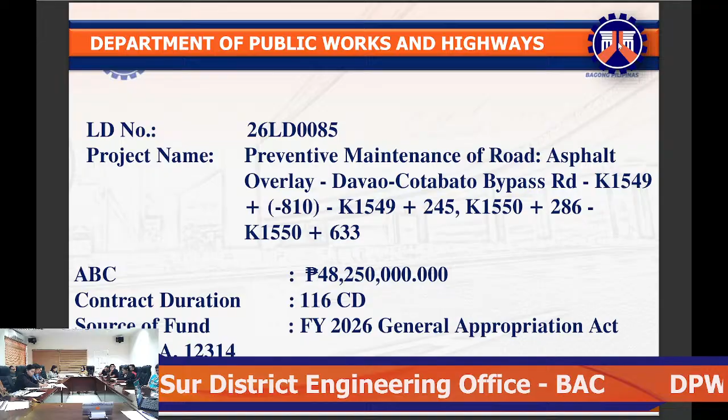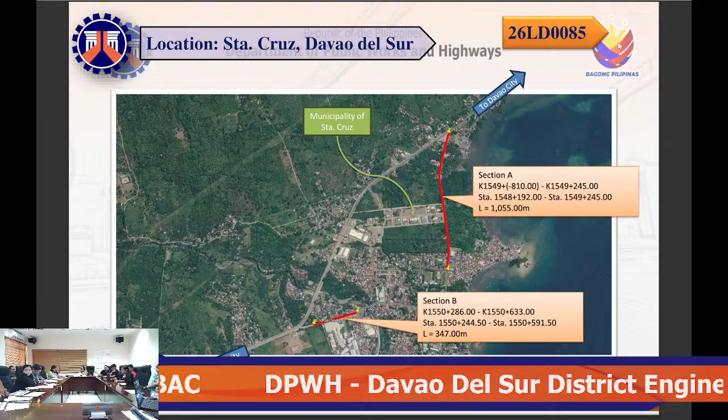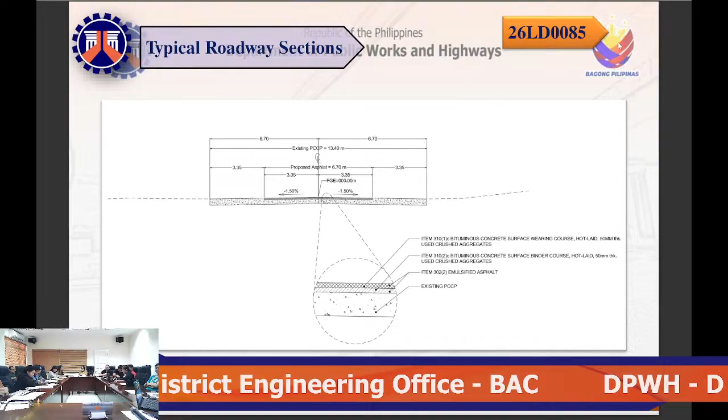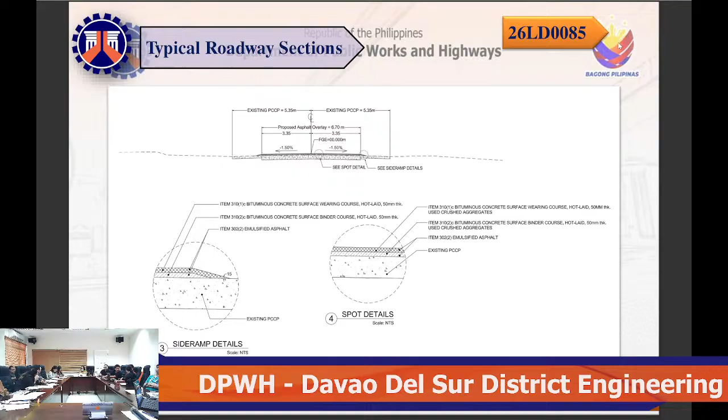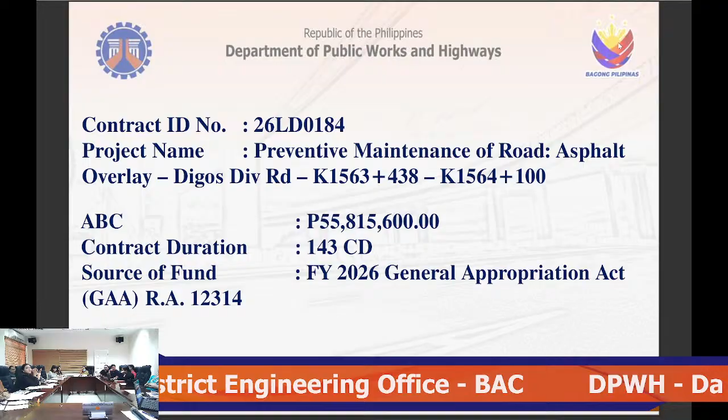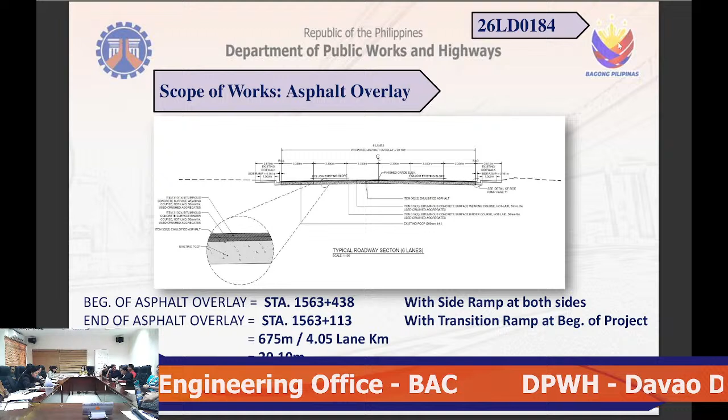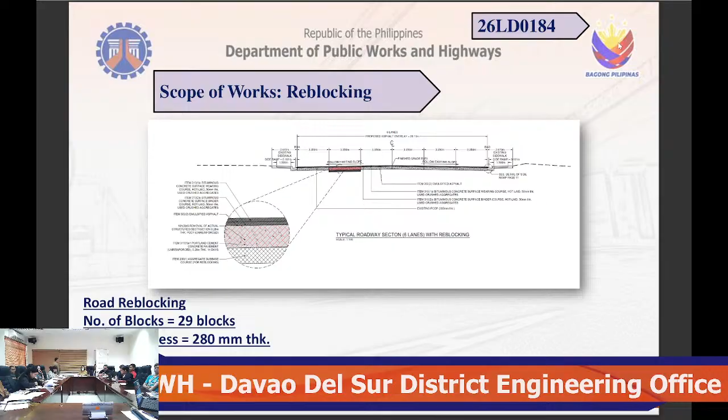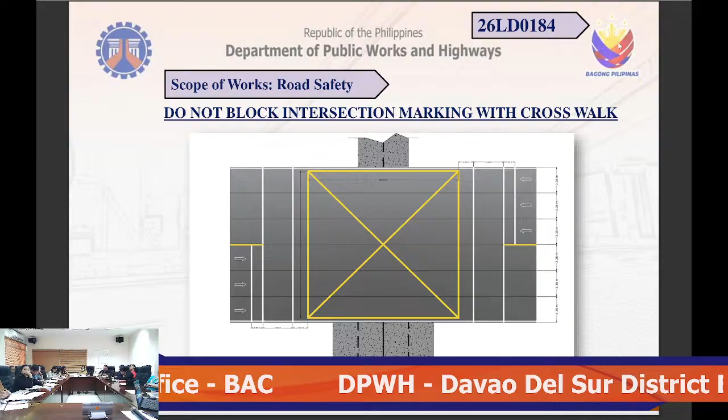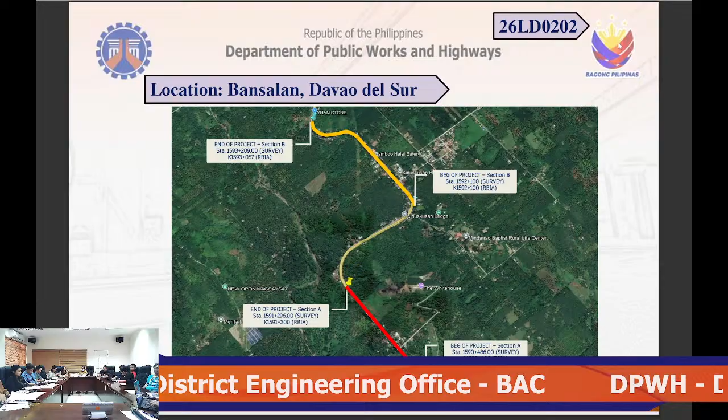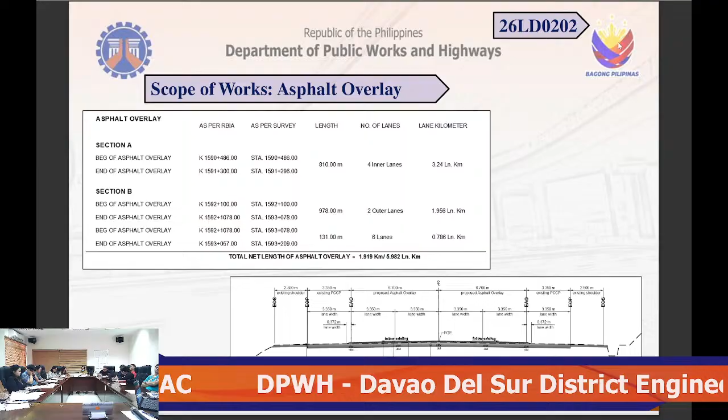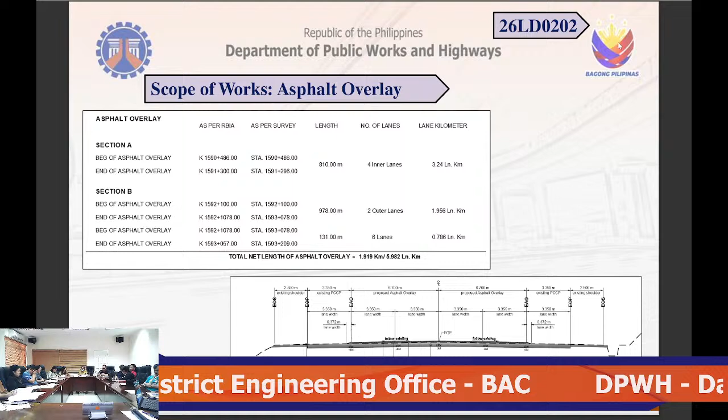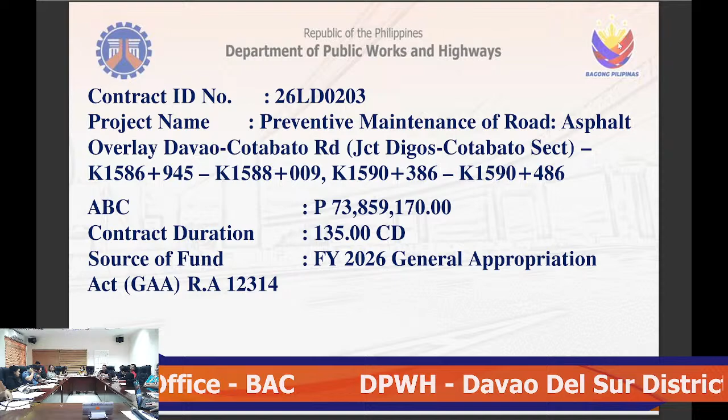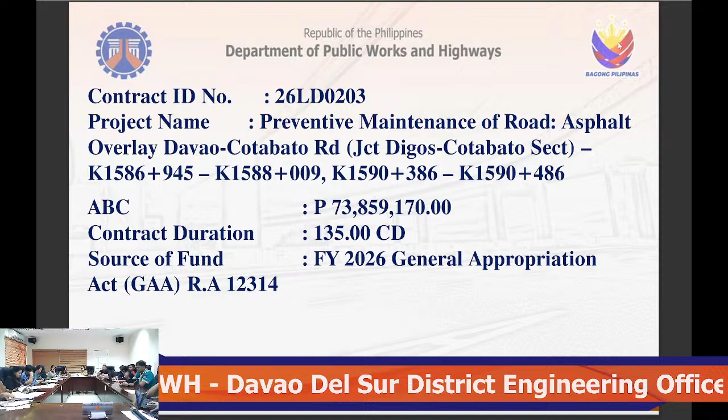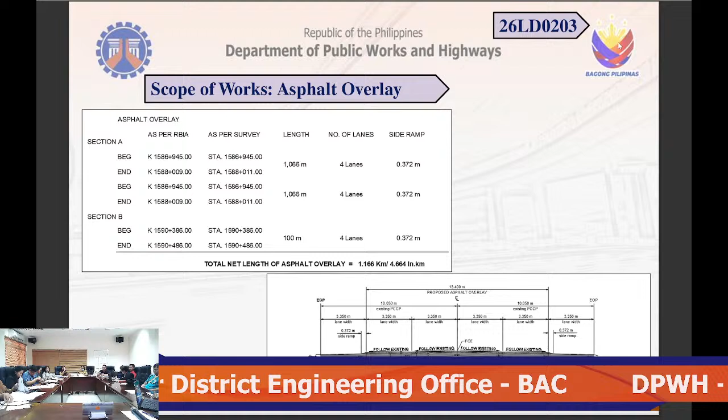Scope 1 is part of Section A, from kilometer 1586 plus 945 to kilometer 1588 plus 009, length of 1,066 meters, 4 lanes. Next, Section B, kilometer 1590 plus 386 to kilometer 1590 plus 486, 100 meters, 4 lanes. Total of 1.166 kilometer or 4.664 4-lane kilometer.

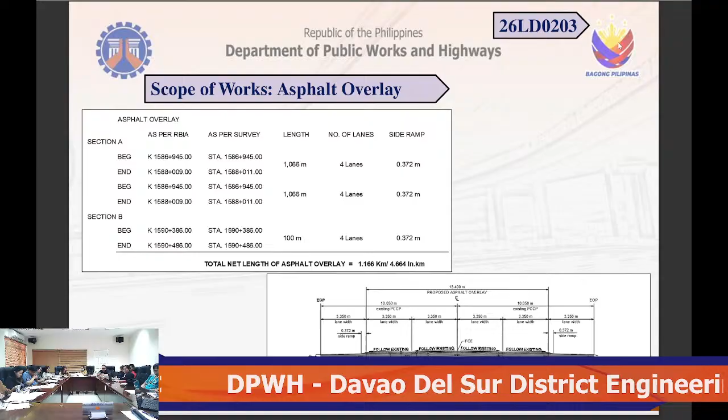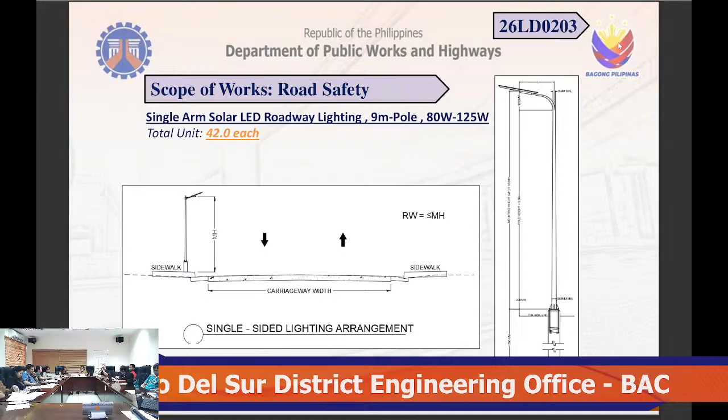And for the structural concrete, use 4,000 PSI and use plus aggregates. So that's only for the roads for project one.

Good afternoon, everyone. Let's proceed to the building projects. We have about 3 building projects for today's pre-bid conference.

Let's start with contract ID number 26LD0091, contract name Rehabilitation of Multi-Purpose Building, Gymnasium, Punta, Piape, Padada, Davao del Sur, with appropriation of 4 million pesos and ABC amount of 3,960,000 pesos, with completion of 30 calendar days, funded under 2026 GAA or RA123.

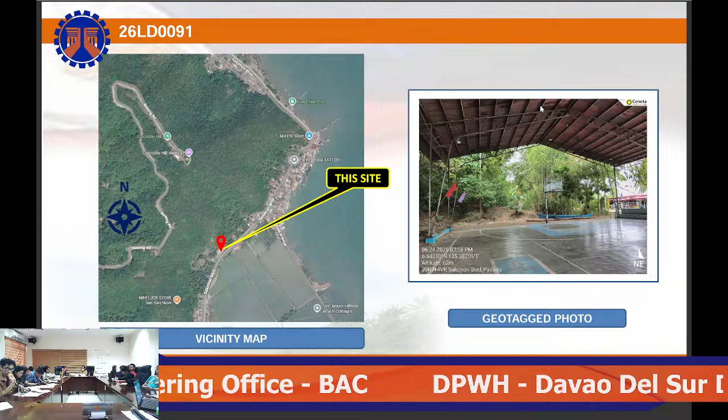So here's the existing gymnasium that has to be rehabilitated. This building or gymnasium is located at Barangay Piape. Here's the vicinity map and here's the building photo of the existing gym.

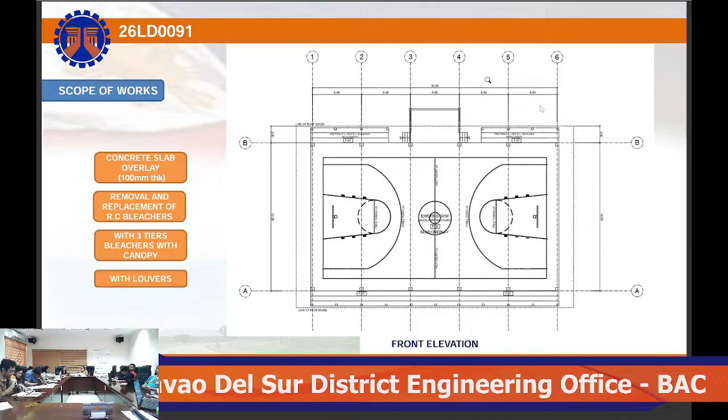Now for the scope of work: a 100-millimeter thick concrete slab overlay with dimensions of 30 meters by 18 meters, removal and replacement of existing reinforced concrete bleachers to be replaced with 3-tier bleachers, and installation of canopy and roofing.

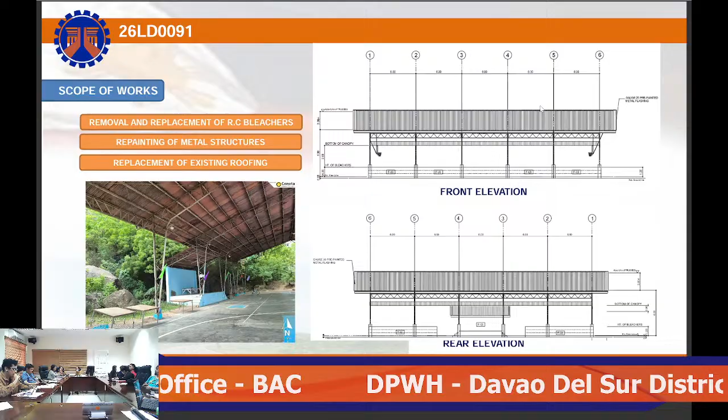Here's the picture, the front and the rear elevation of the gymnasium. Aside from removal and installation of louvers, we also have the repainting of all metal structures and replacement of the dilapidated existing roof.

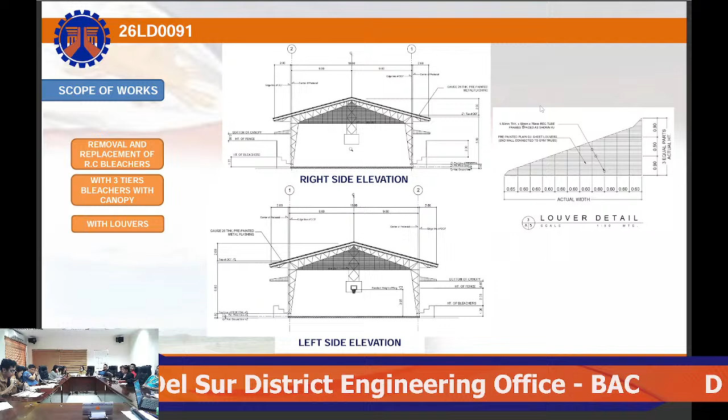Here's the right side and left side elevation showing the louver details and the installed canopy. For the summary of quantities, we have the following: general requirements, permits and clearances, and under earthwork, individual removal, structure removal, and excavation.

We also have reinforced concrete, 3,000 and 4,000 PSI structural concrete, and grade 40 and grade 60 reinforcing steel. Under finishing and other civil works: masonry works, finishing works including reflective insulation, painting works for masonry or concrete and steel, roof framing and roofing works, plumbing including storm drainage and downspout, catch basin, and bridging works.

Next, for contract 2026LD0133, or contract name Construction of Multi-Purpose Building, Food Hall or Social Hall, Digos City Wharf, Dawis, Digos City, Davao del Sur. Appropriation amount of 20 million pesos, ABC amount of 19,800,000 pesos, contract duration of 210 calendar days, funded under 2026.

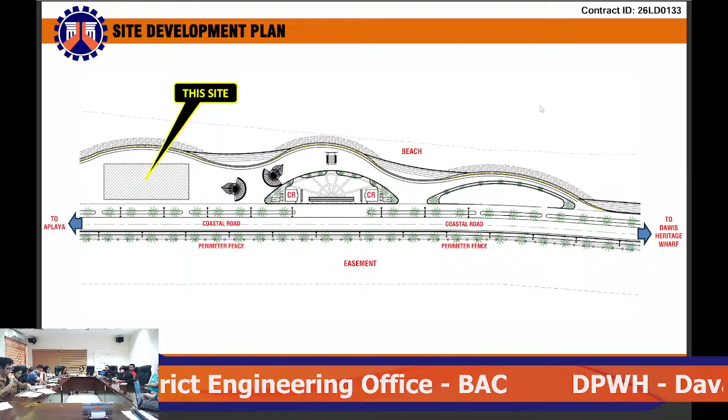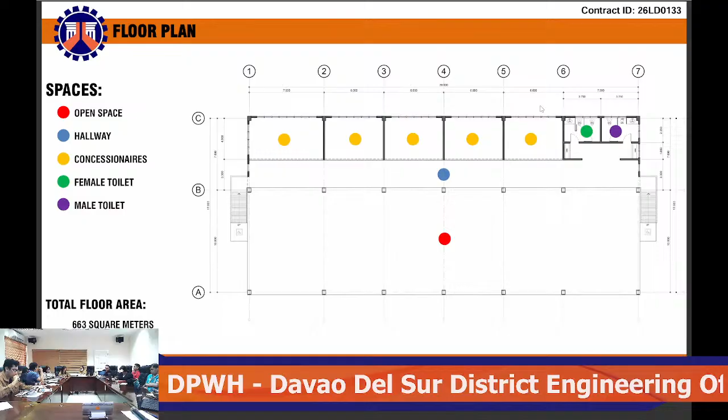Here's the perspective of our social hall or function hall, a one-story building. Here's the floor plan, with dimensions of 39 meters by 17 meters, and total floor area of 663 square meters. The spaces provided include the open space for the social hall or function hall, a hallway, a space for concessionaires, and the female and male toilet rooms.

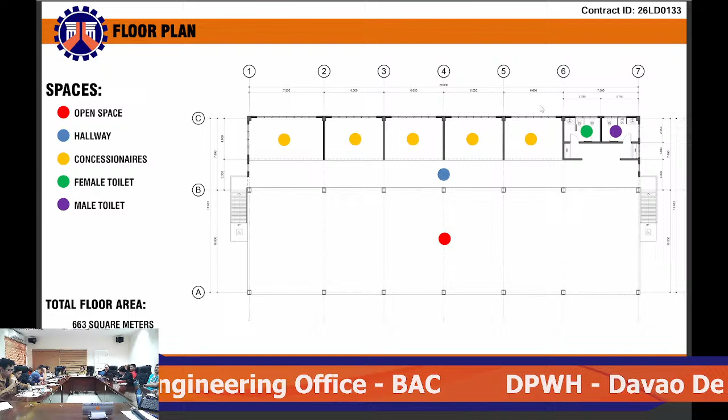Under finishing and other civil works, we have carpentry works, masonry works, fabricated materials for doors and windows, finishing works such as ceiling, insulation, and aluminum cladding, painting works for masonry, concrete, wood and steel, roof framing and roofing works. Also, we have...

And lastly, for contract ID 26LD0196, or contract name Construction of Multi-Purpose Building of Early Child Development Center, Digos City, Davao del Sur, with appropriation amount of 25 million pesos, with ABC amount of 24,750,000 pesos, with a contract duration of 240 calendar days, funded under 2026 DPWH.

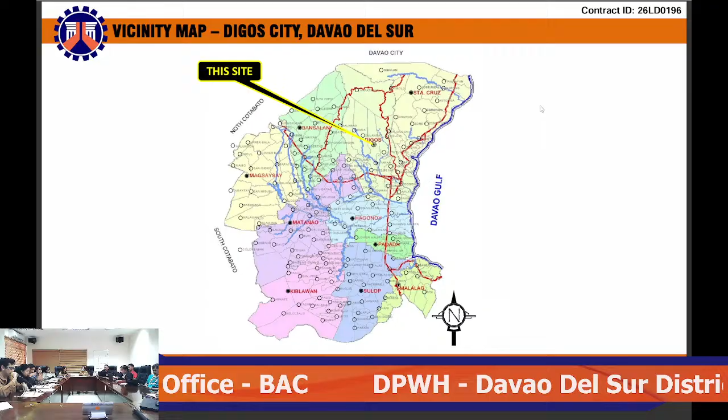Here's a vicinity map, the project is located in Piape, in the newly acquired lot under the City of Digos.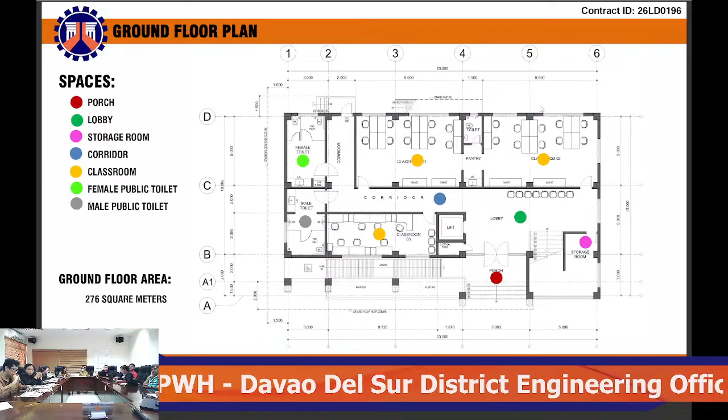For this project, the building has a total floor area of 506 square meters, and on the ground floor, 276 square meters, with dimensions of 23 meters by 10 meters.

So here's the spaces in the ground floor: first, porch, lobby, storage room, corridor, classroom, then a female and male public toilet.

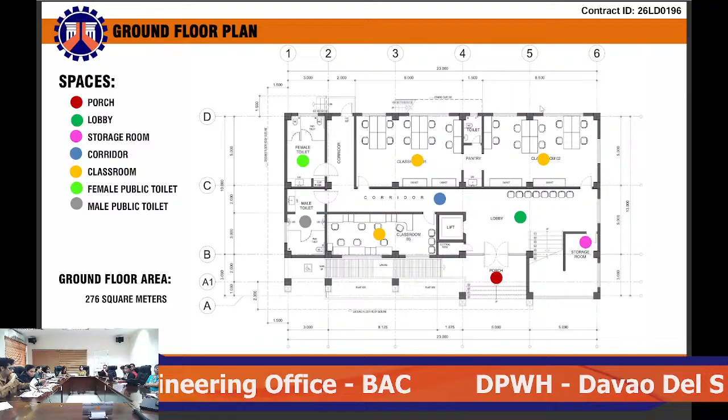In the second floor, a total floor area of 230 square meters, which includes spaces such as the lobby, office, classroom, activity center, a corridor, and the female and male toilet. So that building is total 506 square meters, both ground floor and second floor.

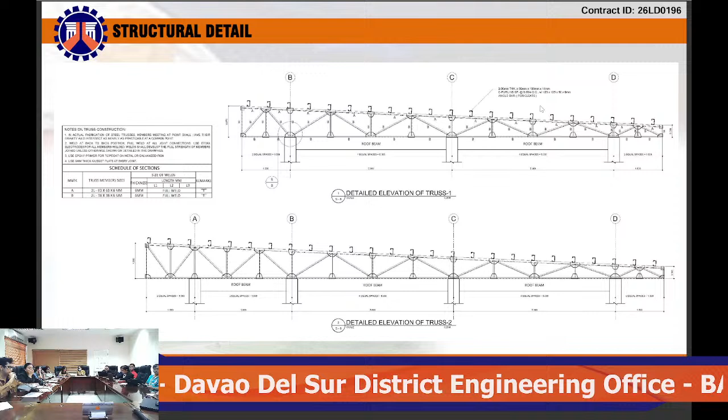Next, for the civil quantities, you have the following requirements: permits and clearances, and earthwork, which includes individual removal of tree, removal of structures, excavation and embankment.

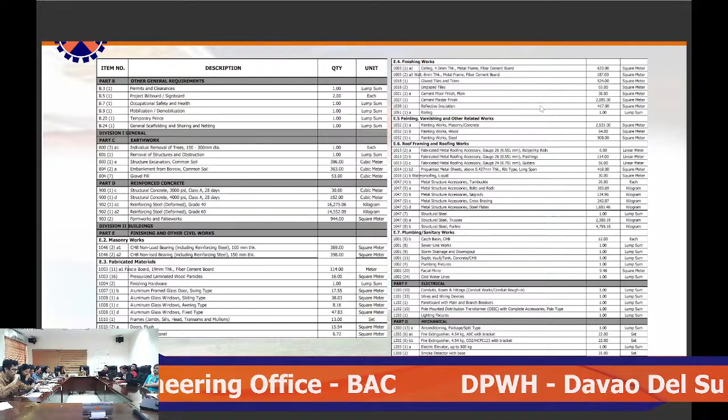Under finishing under civil works, you have masonry works, fabricated materials such as doors and windows, finishing works such as ceiling, tile works, and insulation, painting works for masonry or concrete, wood, and steel, roof framing or roofing works, plumbing,

That's it for the building project.

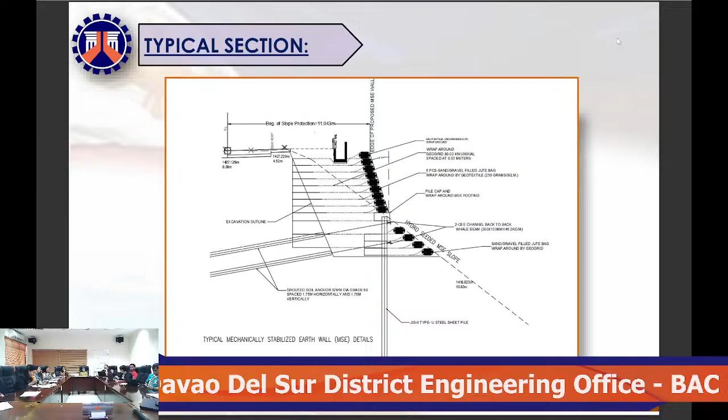For this project, the materials used are steel sheet pile, U-type, with pile cap, and sand gravel filled with jute bag, geotextile, and grouted soil anchor.

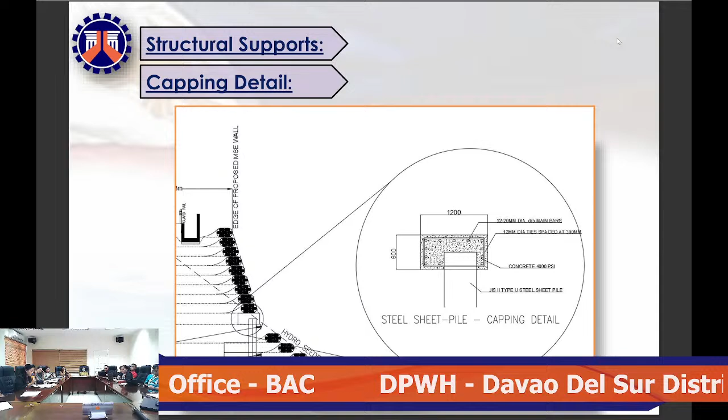Next, shown is the blow up detail of the cap with a dimension of 0.6 meters by 1.2 meters, and the sheet pile is U-type.

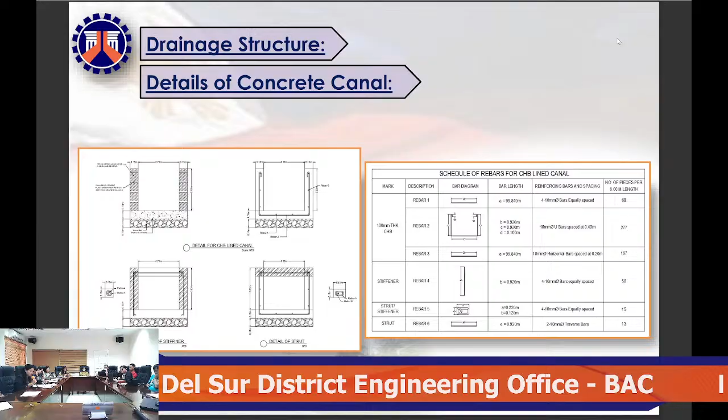Next, shown is for drainage structure. Shown is the typical detail of lined canal reinforced concrete. The strength of the canal is 3,000 psi, with a width of 0.7 meters and height of 0.8 meters.

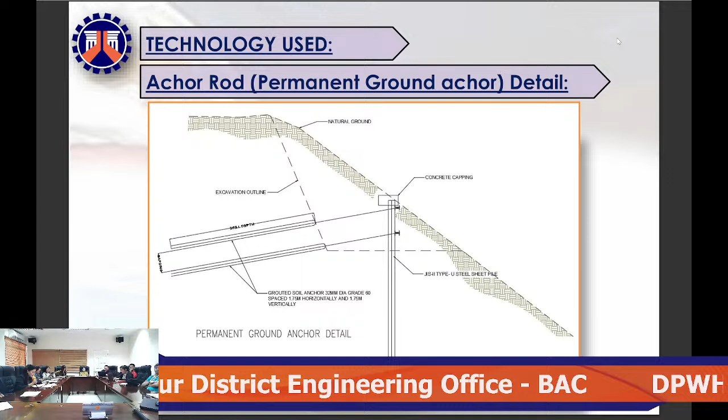Next, one of the technologies used for this project is [ground anchor/soil nail], shown is the permanent ground anchor, 32 mm diameter, grade 60, spaced 1.75 meters horizontally and 1.75 meters vertically.

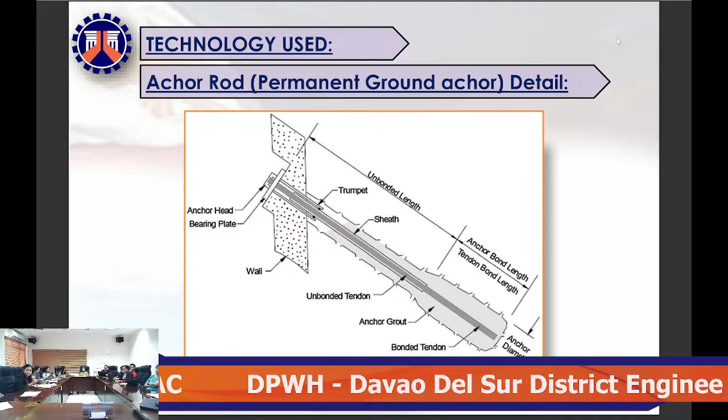Next, shown is the detail again for blow up detail. Next, another technology used is sandbag.

The sandbag is filled with jute bag wrapped around by geotextile. Next, shown is the blow up detail of the sandbag used for this project.

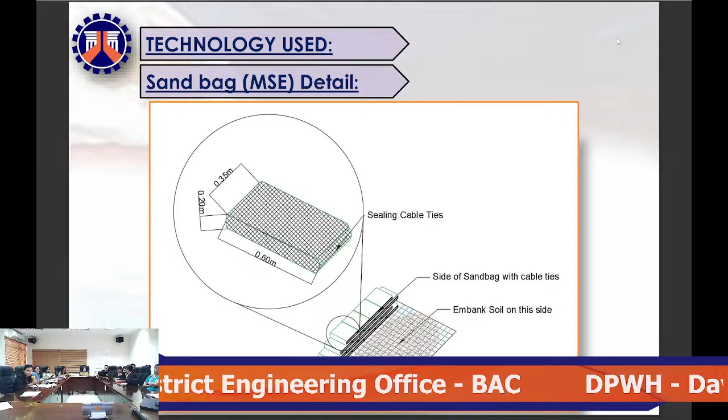Next, for 26LD0194, with a project name of Construction of Road Slope Protection Structure, Bansalan-Mt National Park Road, kilometer post 1602 plus 449 to kilometer post 1602 plus 754, with an ABC of 113,484,000, with a contract duration of 461 calendar days, and source of funds backlog in 2026.

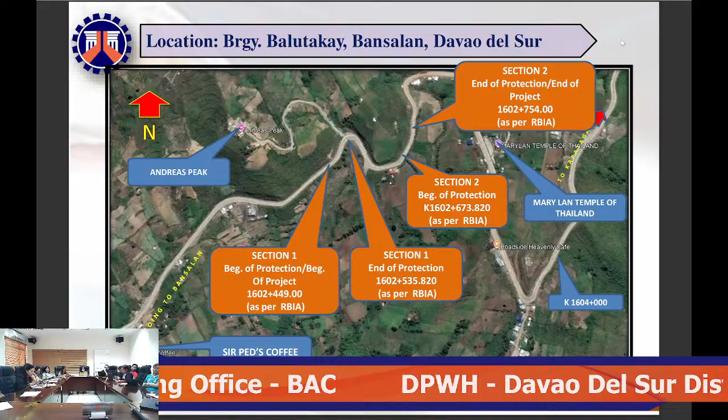For this project, it composes of two sections, and again, it is located at Barangay Balutakay, Bansalan, Davao del Sur. Shown is the location map of the project.

Shown is the typical detailed road section of the project. There is also a widening of road, one lane only at the right side, with a width of 3.35 meters, thickness of 0.3 meters, and also paved shoulder with a width of 1.5 meters, thickness of 0.15 meters.

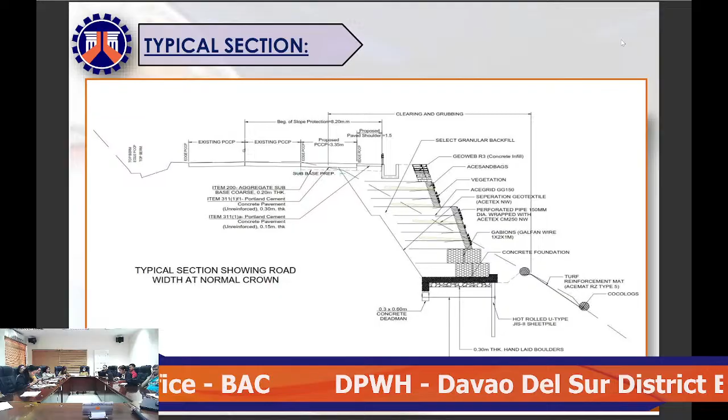And shown also, there's also for drainage, we propose also a lined canal reinforced concrete. For this, the materials used for this project are geoweb with sandbags, also vegetation, geotextile, and gabions.

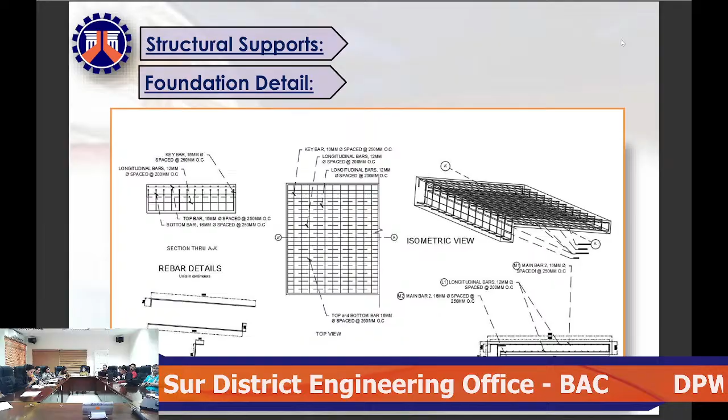Next, for structural support, shown is the foundation detail of the project. Next, shown is the blow-up detail of the foundation.

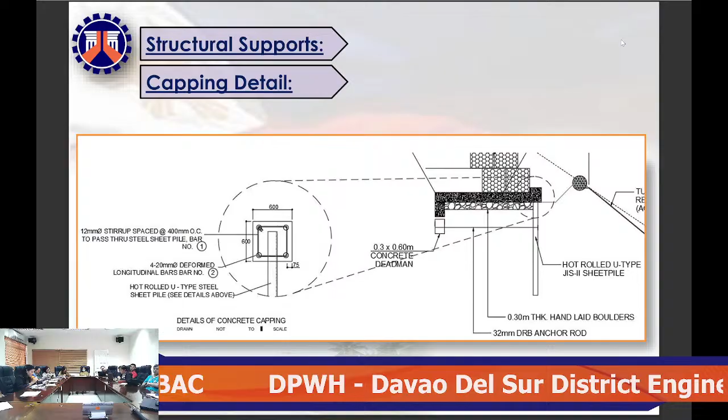Also, for structural support, shown is the blow-up detail of capping. The dimension of capping used is 0.6 by 0.6 meters, and the sheet pile used also is hot rolled U-type steel sheet pile.

For drainage structure, we propose a complete canal, a lined canal reinforced with a strength of 3,000 psi, width of 0.7 meters, height of 0.8 meters.

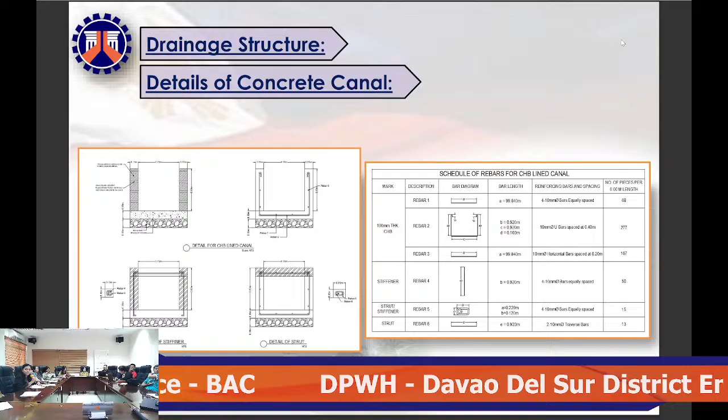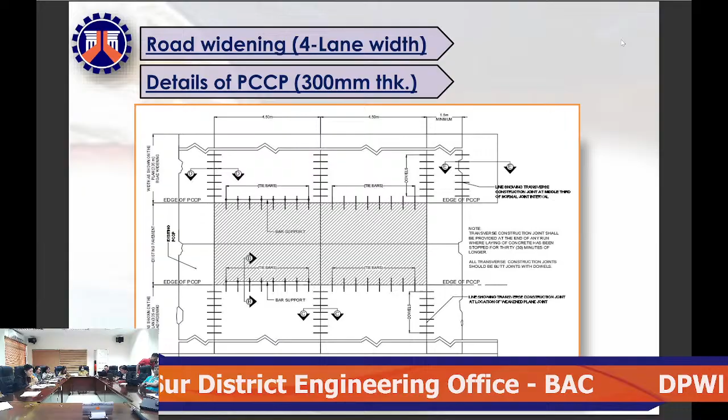And for safety, we provide the signage, which is the chevron. Shown is the details of the chevron, with a typical size of 450 by 600.

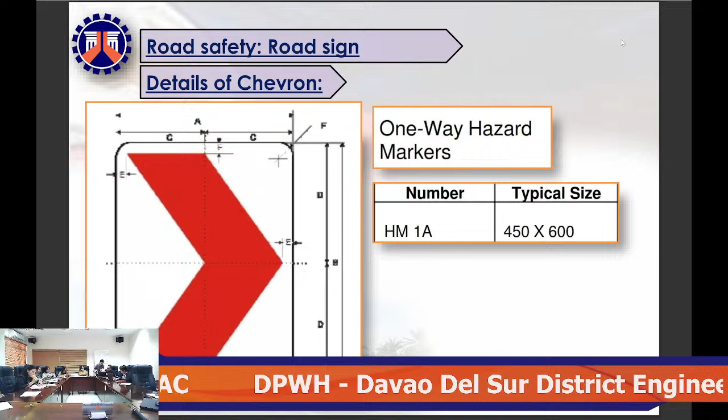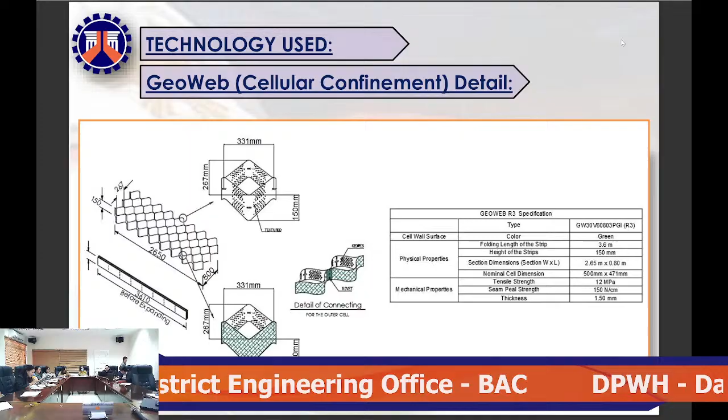For this project, one of the technologies used is GeoWeb. Shown is the GeoWeb cellular confinement detail and its specification.

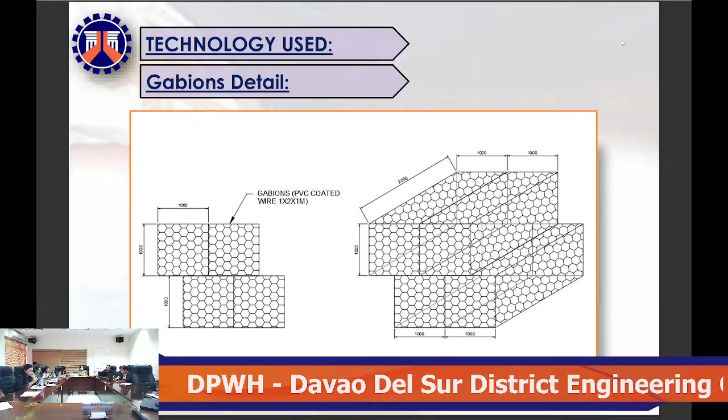Next, shown is the typical detail of gabion. Shown is the elevation and perspective of the gabion.

The next agenda, number 1B, the requirement of bidding documents, including instruction to bidders, general condition of contract, special condition of contract, specification, drawings, bill of quantities, and forms.

For agenda number 1C, the documents to be submitted by the bidders. And for agenda number 1D, the criteria and procedure for eligibility check, preliminary examination of bids, detailed evaluation of bids, post-qualification, and award, to be discussed by Engineer Achilles Lemy Gomez.

Bid envelope shall contain the following technical documents, including the eligibility documents.

First, valid PhilGEPS registration certificate, platinum membership, all pages, in accordance with section 20 of the IRR of RA 12009. QR code must be clear and readable. Failure of the bidder to update its PhilGEPS certificate of registration with current and updated supporting documents shall result in the automatic suspension of the bidder's certificate.

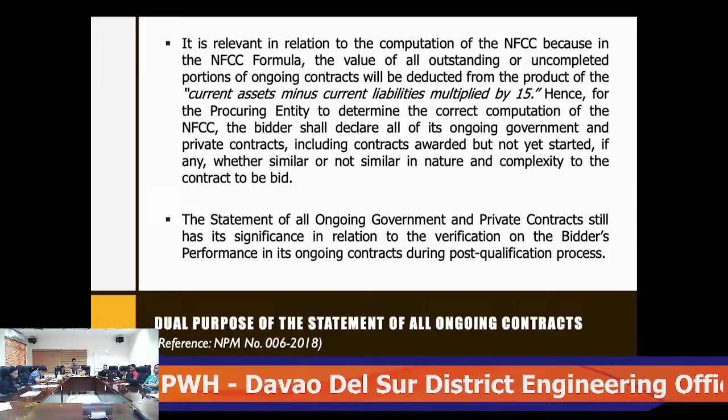Hence, for the procuring entity to determine the correct computation of the NFCC, the bidder shall declare all of its ongoing government and private contracts, including contracts awarded but not yet started, if any, whether similar or not similar in nature and complexity to the contract to be bid.

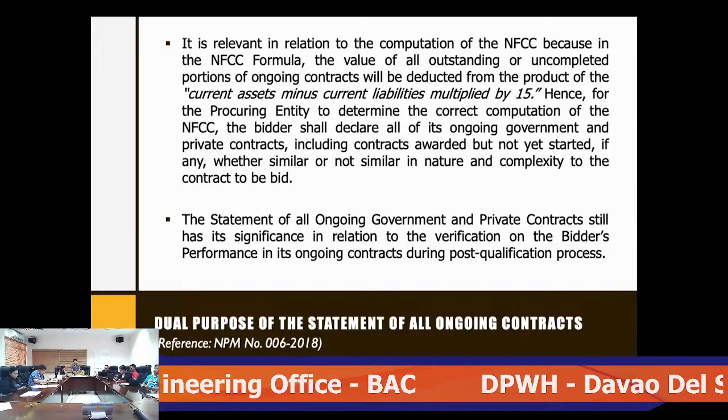The statement of all ongoing government and private contracts still has its significance in relation to the verification of the bidder's performance in its ongoing contracts during the post-qualification process.

Fourth, statement of single largest completed contract, or SLCC, similar to the contract to be bid, in accordance with instructions to bidders, clause 5.5. SLCC must be equivalent to at least 50% of the ABC.

Use the prescribed template provided in the bidding documents. Attachments: one, copy of contract; two, copy of certificate of completion; and three, copy of certificate of final acceptance issued by the project owner other than the contractor, or a final rating of at least satisfactory in the constructor's performance evaluation system.

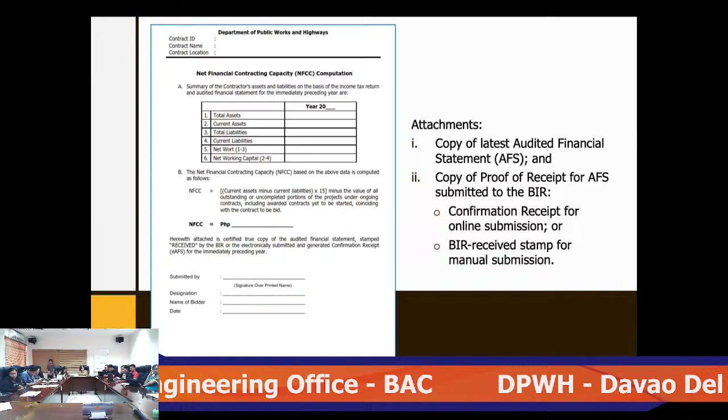In case of contracts with the private sector, an equivalent document template is provided in the bidding documents. Attachments: one, copy of latest audited financial statement, or AFS; and two, copy of proof of receipt for AFS submitted to the BIR, confirmation receipt for online submission, or BIR-received stamp for manual submission.

Sixth, joint venture agreement, if applicable. Joint ventures may participate, provided that the primary purpose of each member must be similar or related to the requirements of the project.

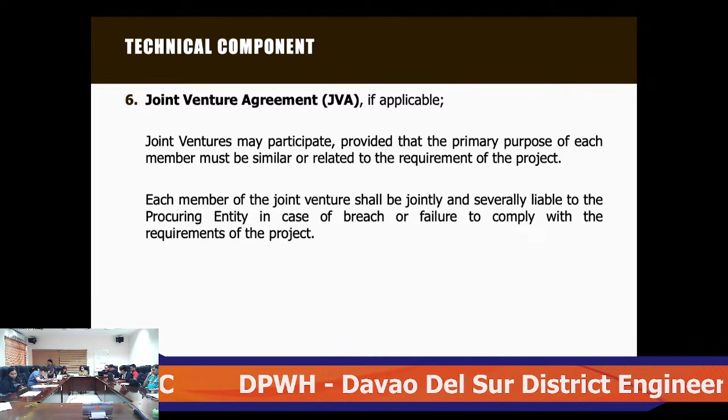Each member of the joint venture shall be jointly and severally liable to the procuring entity in case of breach or failure to comply with the requirements of the project.

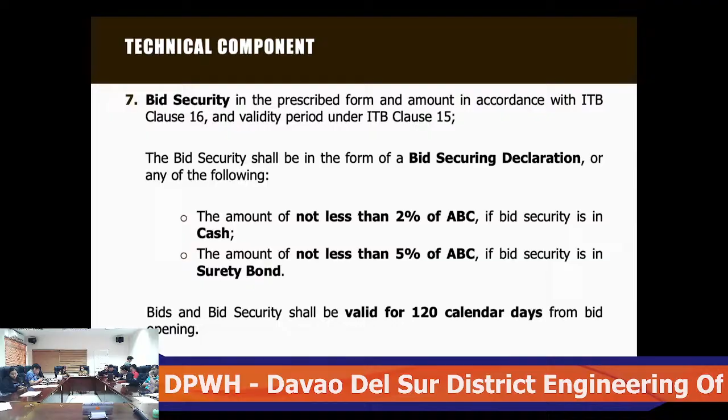Seventh, bid security in the prescribed form and amount in accordance with Instructions to Bidders, Clause 16, and validity period under Clause 15. The bid security shall be in the form of a bid securing declaration, or any of the following: an amount not less than 2% of the ABC if bid security is in cash, or not less than 5% of the ABC if bid security is in a surety bond. Bids and bid security shall be valid for 120 calendar days from bid opening.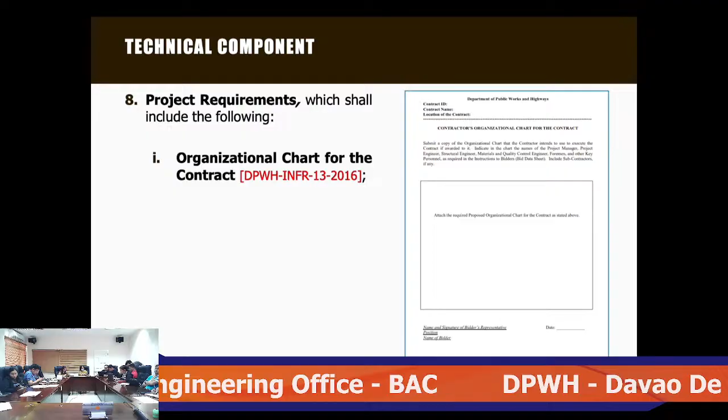Eighth, project requirements, which shall include the following: first, organizational chart for the contract, using the prescribed template provided in the bidding documents.

Second, list of contractors' key personnel to be assigned to the contract with their qualification data. These personnel must meet the required minimum years of experience set in the bid data sheet, using the prescribed template provided in the bidding documents. Attachments: letter of nominee, notarized certificate of employment, biodata, copy of PRC ID, PTR, TIN, and certificate of accreditation and training. Key personnel, particularly the project manager, project engineer, and materials engineer, must be different persons.

Accredited safety officer required upon issuance of notice of award, subject to Department Order Number 35, Series of 2021. First aider with certificate of training issued by the Red Cross, in compliance with Department of Labor and Employment requirements for the approval of construction safety and health program, required upon issuance of notice of award, subject to Department Order Number 35, Series of 2021.

Compliance to DOLE Department Order Number 252, Series of 2025, the revised implementing rules and regulations of Republic Act Number 11058, entitled An Act Strengthening Compliance with Occupational Safety and Health Standards and Providing Penalties for Violations thereof.

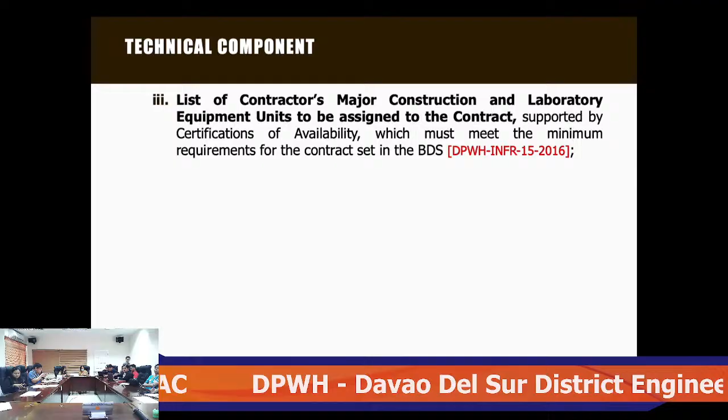Third, list of contractors' major construction and laboratory equipment units to be assigned to the contract, supported by certifications of availability, which must meet the minimum requirements for the contract set in the bid data sheet, using the prescribed template provided in the bidding documents.

Attachments: proof of ownership, ORCR, and affidavit of ownership; lease contract and affidavit of commitment, if applicable; purchase agreement, if applicable; certification of availability of equipment issued by owner, lessor, or vendor; and certification of minimum laboratory equipment duly certified by any DPWH office.

Fourth, notarized omnibus sworn statement in accordance with Section 54.3 of the IRR of RA 12009, supported by duly notarized special power of attorney, board or partnership resolution, or secretary's certificate, whichever is applicable.

Fifth, latest General Information Sheet, or GIS, reflecting the beneficial ownership information duly received by the Securities and Exchange Commission for corporations. Sixth, ISO 9001-2015 certification, or its latest version, as applicable, in compliance with Department Order Number 110, Series of 2024.

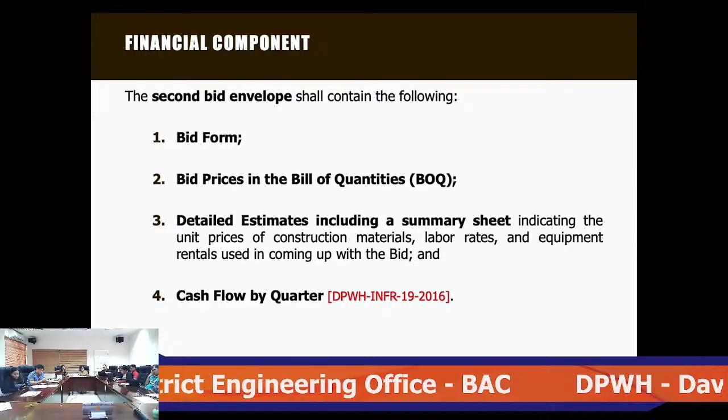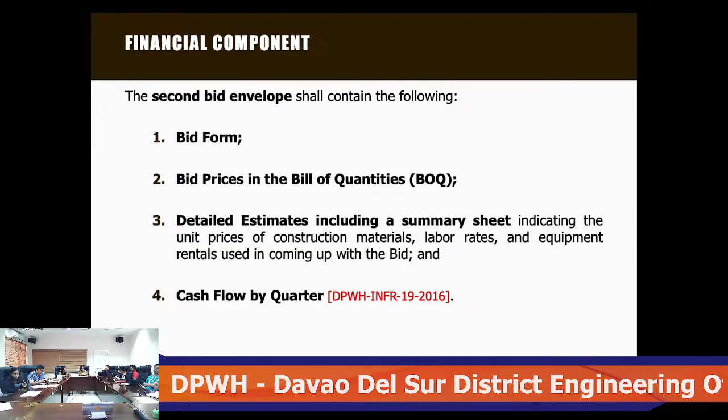The second bid envelope, or the financial component, shall contain the following: first, bid form; second, bid prices in the bill of quantities; third, detailed estimates, including a summary sheet indicating the unit prices of construction materials, labor rates, and equipment rentals used in coming up with the bid; and fourth, cash flow by quarter, using the prescribed template provided in the bidding documents.

Format and signing of bids. Bidders shall submit their bids through their duly authorized representative, using the appropriate forms provided in Section 9, Philippine Bidding Documents related forms, on or before the deadline specified in ITB Clause 19, in two separate sealed bid envelopes, which shall be submitted simultaneously, whether through manual or online electronic submission.

The first envelope shall contain the technical component of the bid, including eligibility requirements under ITB Clause 12, and the second envelope shall contain the financial component of the bid.

Forms as mentioned in ITB Clause 17.1 must be completed without any alterations to their format. No substitute form shall be accepted. Each and every page of the bid form, including the bill of quantities under Section 9 hereof, shall be signed by the duly authorized representative of the bidder. Failure to do so shall be a ground for the rejection of the bid.

Any insertions, erasures, or overwriting shall be valid only if they are signed or initialed by the duly authorized representative of the bidder. Sealing and marking of bids: bidders shall enclose their technical documents described in ITB Clause 12 in one sealed envelope marked as technical component, and the financial component in another sealed envelope marked as financial component, sealing them all in an outer envelope marked as bid.

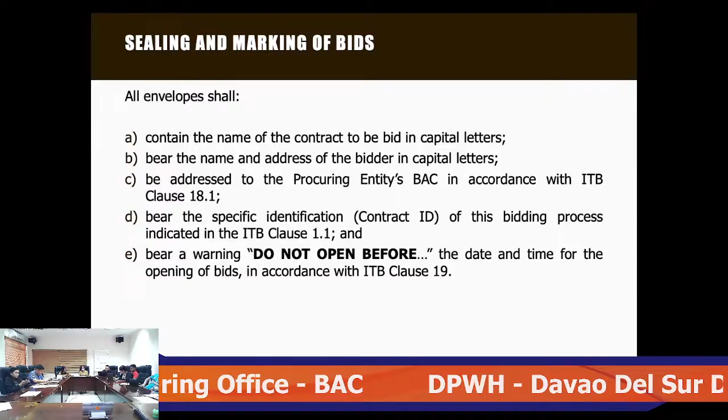The bid shall be typed or written in ink and shall be signed by the bidder or its duly authorized representative. All envelopes shall contain the name of the contract to be bid in capital letters, bear the name and address of the bidder in capital letters, be addressed to the procuring entity's Bids and Awards Committee in accordance with ITB Clause 18.1, bear the specific identification of this bidding process indicated in ITB Clause 1.1, and bear a warning: do not open before the date and time for the opening of bids, in accordance with ITB Clause 19.

For manually submitted bid envelopes that are not properly sealed and marked as required in the bidding documents, the same shall be accepted, provided that the bidder or its duly authorized representative shall acknowledge such condition of the bid as submitted. On the other hand, unsealed or unmarked bid envelopes, or bids that cannot be opened or are corrupted in case of online submission, shall be rejected. The Bids and Awards Committee shall assume no responsibility for misplaced or lost contents of the improperly sealed or marked bid, or for its premature opening.

Bid documents must be prepared on A4 size paper and properly labeled with ear tag, matching those on the checklist. All supporting documents, photocopied from the original, shall be legibly readable and will be authenticated as needed during the post-qualification process. Illustration for the sealing and marking of bids.

The bidder shall submit one original and one copy of the technical and financial components of its bid.

Submission and receipt of bids. Bid submission may be done manually or electronically. However, bidders should only select one mode of submission, either manual or electronic online. For bids to be submitted manually, bids must be duly received by the Bids and Awards Committee Secretariat on or before the scheduled date set in the bidding documents.

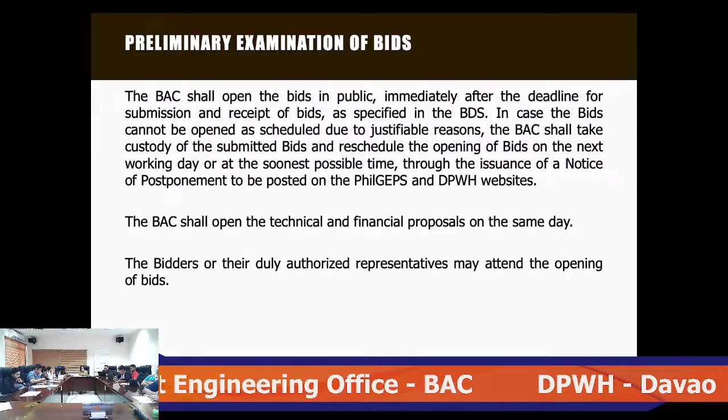Preliminary examination of bids. The Bids and Awards Committee shall open the bids in public immediately after the deadline for submission and receipt of bids, as specified in the bid data sheet. In case the bids cannot be opened as scheduled due to justifiable reasons, the Bids and Awards Committee shall take custody of the submitted bids and reschedule the opening of bids on the next working day, or at the soonest possible time, through the issuance of a notice of postponement to be posted on the PhilGEPS and DPWH websites.

The Bids and Awards Committee shall open the technical and financial proposals on the same day. The bidders or their duly authorized representatives may attend the opening of bids. Detailed evaluation and comparison of bids follows.

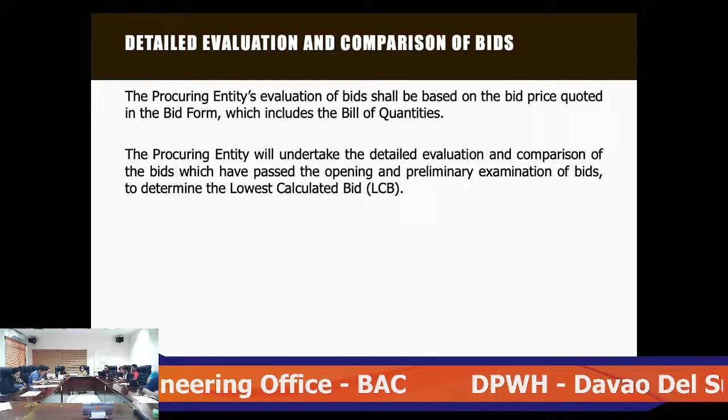The procuring entity's evaluation of bids shall be based on the bid price quoted in the bid form, which includes the bill of quantities. The procuring entity will undertake the detailed evaluation and comparison of the bids which have passed the opening and preliminary examination to determine the lowest calculated bid, or LCB. The Bids and Awards Committee shall immediately conduct a detailed evaluation of all bids using non-discretionary criteria, considering the following.

A. Completeness of the bid. Bids not addressing or providing all of the required items in the bid data sheet shall be considered non-responsive and thus automatically disqualified. B. Arithmetical corrections.

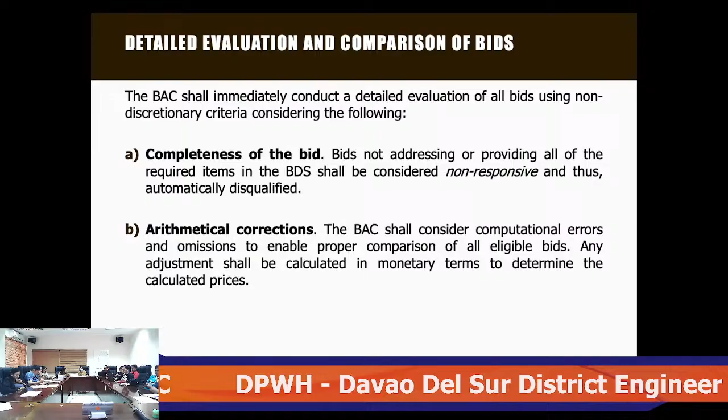The BAC shall consider computational errors and omissions to enable proper comparison of all eligible bids. Any adjustment shall be calculated in monetary terms to determine the calculated prices. The BAC shall evaluate all bids on an equal footing to ensure fair and competitive bid comparison.

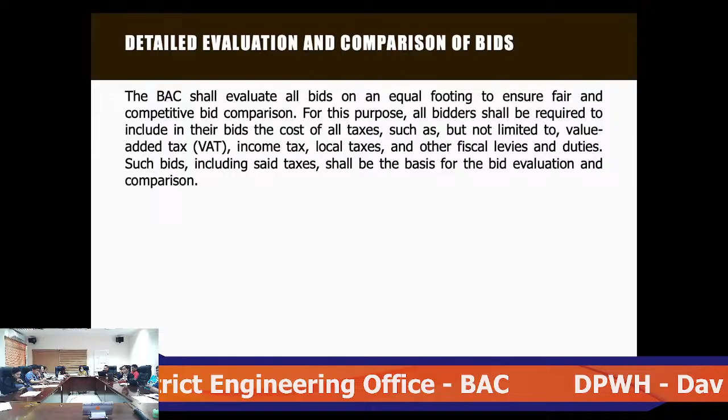For this purpose, all bidders shall be required to include in their bids the cost of all taxes, such as, but not limited to, value-added tax, income tax, local taxes, and other fiscal levies and duties. Such bids, including said taxes, shall be the basis for the bid evaluation and comparison.

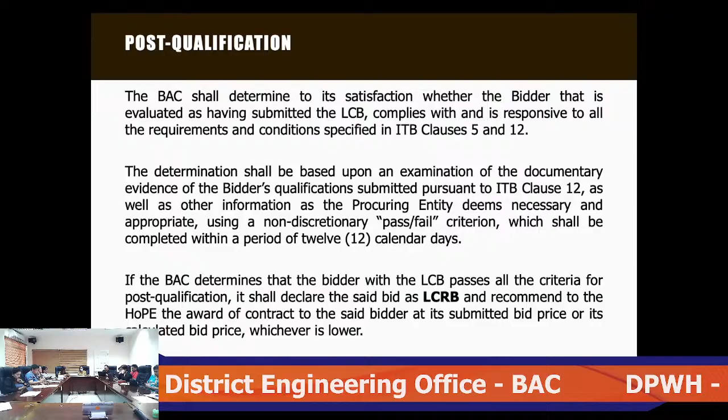Post-qualification. The BAC shall determine to its satisfaction whether the bidder evaluated as having submitted the lowest calculated bid complies with and is responsive to all the requirements and conditions specified in ITB Clause 5 and 12. The determination shall be based upon an examination of the documentary evidence of the bidder's qualifications submitted pursuant to ITB Clause 12, as well as other information as the procuring entity deems necessary and appropriate, using a non-discretionary pass or fail criterion, which shall be completed within a period of 12 calendar days.

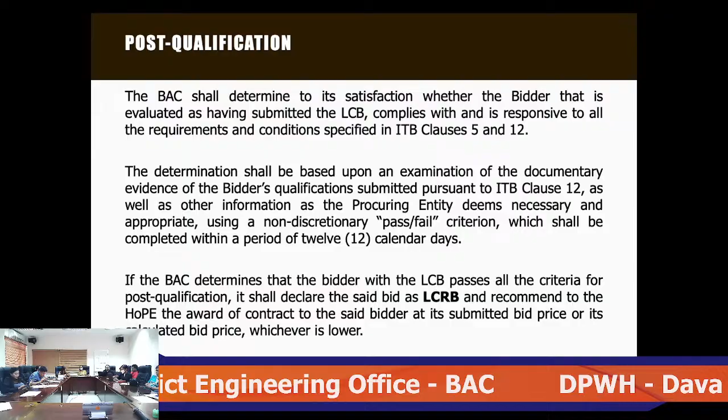If the BAC determines that the bidder with the LCB passes all the criteria for post-qualification, it shall declare the said bid as lowest calculated responsive bid and recommend to the head of the procuring entity the award of contract to the said bidder at its submitted bid price or its calculated bid price, whichever is lower.

Reservation clause. Notwithstanding the eligibility or post-qualification of a bidder, and without incurring any liability, the head of the procuring entity, at any stage of the procurement, reserves the right to review its qualifications, reject any and all bids, declare a failure of bidding, or not award the contract in the following situations.

A. If it has reasonable grounds to believe that a misrepresentation has been made by the said bidder. Or B. If it has reasonable grounds to believe that there has been a change in the bidder's capability to undertake the project from the time it submitted its eligibility requirements.

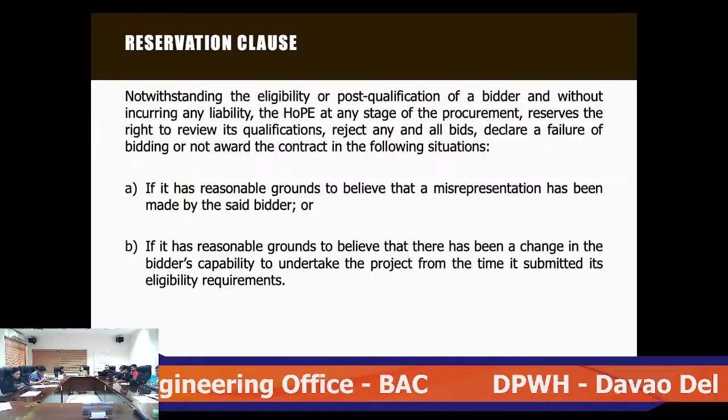Should such review uncover any misrepresentation made in the eligibility and bidding requirements, statements, or documents, or any changes in the situation of the bidder which will adversely affect its capability to undertake the project so that it no longer meets the prescribed eligibility or bid evaluation criteria, the procuring entity shall consider the said bidder as ineligible and disqualify it from participating further in the bidding process or being awarded the contract.

Award of contract. The head of the procuring entity shall award the contract to the bidder whose bid has been determined to be the lowest calculated responsive bid, or LCRB. The procuring entity shall notify the winning bidder in writing that its bid has been accepted through a notice of award duly received by the bidder or its representative person.

End of presentation. Thank you.